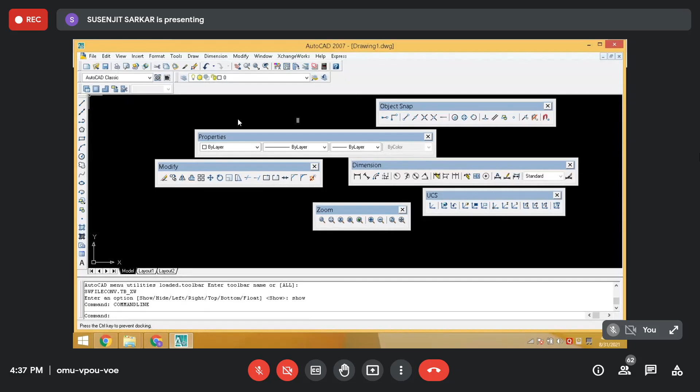In similar fashion, I'm doing this. Okay, this one, I want to remove, cross it out. I don't want this toolbar for the time being. Okay, there is another one. Layers, close it.

Okay, now your screen looks like this: this is the title bar, then menu, standard toolbar, working space, layout model tab, and this is the command line.

Just at the bottom, you may have some other tabs which indicate different modes. You will understand this later. At the bottom left corner of the screen, you can see some digits. Can you see it? These are basically coordinates, X, Y, Z.

If you move your cursor on the screen, you can see that X and Y coordinates are changing. I'm not talking about the units; we can fix the unit later. X and Y coordinates are changing, while the third one, the Z coordinate, remains 0, with no change. This means that on this black or white space, if you move your pencil or cursor, you are basically changing your XY position, XY coordinates, without changing the Z coordinate.

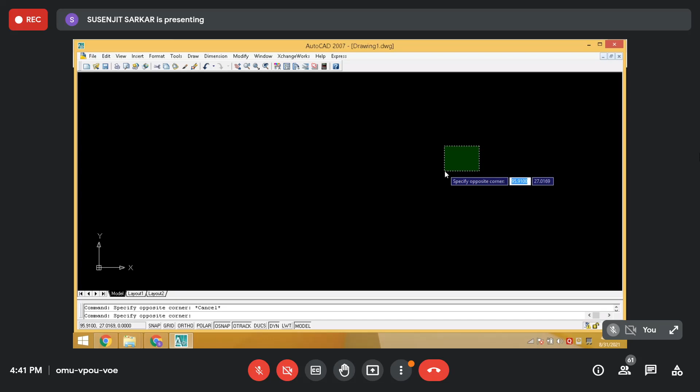Right. See here on the screen, some command prompt is invoked. To get out of this command, what I have to do is press escape. I have to press escape, then you will see the current command is stopped. So remember, if suddenly or accidentally any command starts working without your knowledge, or by any mistake, to get out of that command you have to press escape.

Okay, now I have to bring back those toolbars which are necessary for the drawing. All of you can see my command. What I do is move the cursor very slowly between the menu and standard toolbar. This is the menu bar, this is the standard toolbar. Place the cursor in between the menu and standard toolbar, which is neither on the menu bar nor on the standard toolbar.

Then press the right button of the mouse. If you press it, you will see a pane will open like this, where many things are written.

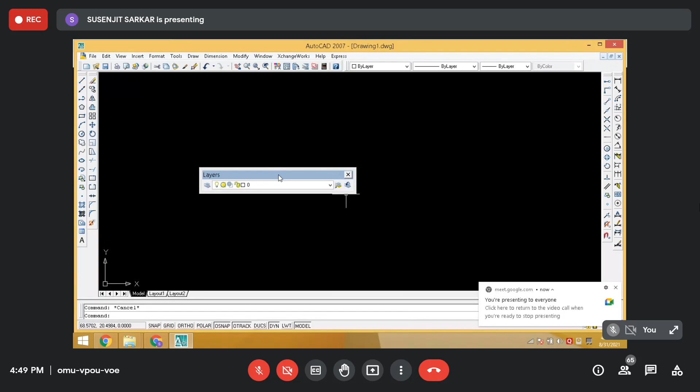Then the layer toolbar, which is very important, layers, just below the standard toolbar. Viewport toolbar, which is also important. Zoom toolbar, very important. UCS, User Coordinate System, important.

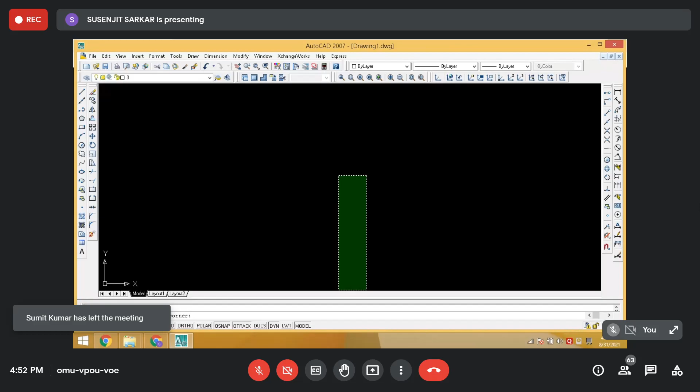Now, anything you do here—suppose I click, suppose I press the left mouse button on the screen, keeping the cursor on the screen, you will see that coordinates here are changing. At the same time, in the command line, command prompt, you will see the command specify opposite corner. AutoCAD is asking me to give the opposite corner. That means whatever I do on the screen, everything will be stored or written on the command prompt.

Someone is trying to join. This is done.

Actually, this happens accidentally, so to get out of that I press escape. When I press escape, you will see that this line will go out. See, it is refreshed.

Now, you have to make your screen look like this. Okay, so hopefully the first part is clearly understood by you all.

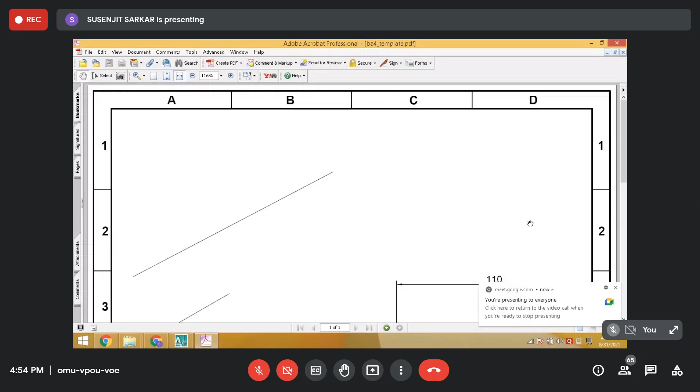Next part is this one. Can you see the screen? Yes sir, yes sir. This is called the template.

In the first year, first sem or second sem, you have drawn some figures, curves on the drawing sheet or A4 sheet, where you have made the template, with outside lines, borders. So here also in AutoCAD we can prepare this kind of template with margins and border lines.

In manual drawing, for each assignment, you need to prepare the template. That was a little bit time consuming because you are doing the same thing for each assignment. But here in AutoCAD, you have an advantage.

If you can prepare this template once, you can store it with the extension DWT, meaning template extension—dot DWT files. It is called DWT files, template files. If you can store this file in your system, each and every time you can call this template and draw on the template itself.

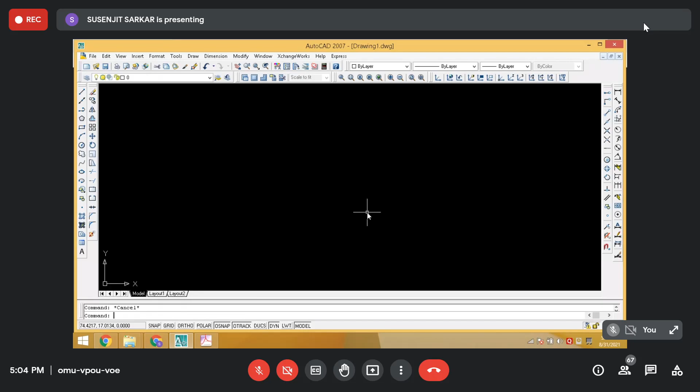Now you have to do one thing - these are very, very important steps while creating the template. And if you create the template and save it, when you call back the template for a newer assignment, all the settings will be saved as it was created during the time of creating the template, right? So these are very important.

Next, you have to go to Limit. Limit is a command, it's called draft setting, that you will understand later. Format - where is the... Limits. Is not there. Okay, because here I want to give a particular command which is called limit, right? And this command may be under edit menu, view, insert, or format. Actually, I forgot where it is.

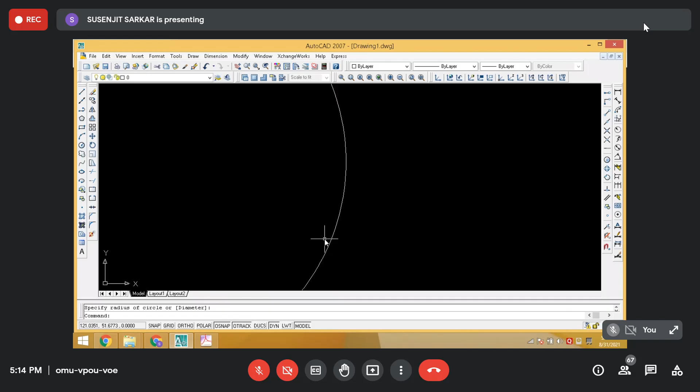Now suppose if I draw one circle like that, you will see that this drawing cannot be seen here because there is no tab. You will understand it later. But I want to show you that if you draw any line, suppose I have drawn a circle over here, and if I take a viewport of this size, then with the help of the viewport, I can see the same drawing over here. But if any portion of the drawing goes out of that limit I have provided, that won't be shown over here.

This is number one. Number two, any line beyond this hidden line, fence line, that won't come on the layout. So this hidden line has got meaning. In that sense, whatever you want to see on the screen or in a print, you have to do it within this fence line, not beyond this line.

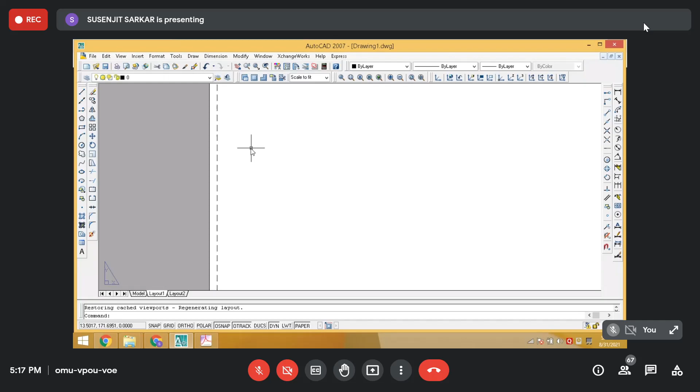Now I have to create a template. For the template, you have seen that the margin lines are thicker lines, so I have to provide some thick lines. And this is done with different layers, with different colors. So we have to understand what a layer is.

Layer is basically that if you want to do the same kind of activity on a screen, that will be saved as a particular layer. If you want to do different kinds of activity, that will be saved in a different kind of layer. Suppose in one layer you have drawn some figures with some thickness, but in another layer you want to give a thicker line, or with different colors, or with some other properties. So you always want similar kinds of things to be stored in a particular layer.

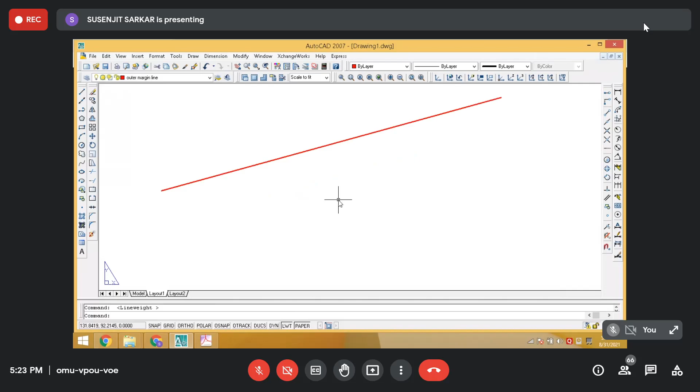This is number one. Another thing, if you click at the bottom, follow my cursor, you will see there is LWT, line weight. If you click it, you can see the thicker line. If I click this one, thin line. If I click it, you can see the thick line.

Zoom all. Delete this. I have to draw a rectangle for the margin. So what I do, I select this rectangle command from the draw toolbar. If I click, follow the command line. Click it. Specify for the rectangular command is invoked. Asks for the first corner point. So you can zoom in, zoom out just by rolling the scroller of the mouse.

Scrolling on the mouse. So what I have to do now, I have to draw a rectangle, but in the command line it is asking for the first corner point. My first corner point is obviously this one, the lower corner of the drawing sheet. But I know at the same time, if I choose any point outside these hidden fencing lines, it would not come in the print.

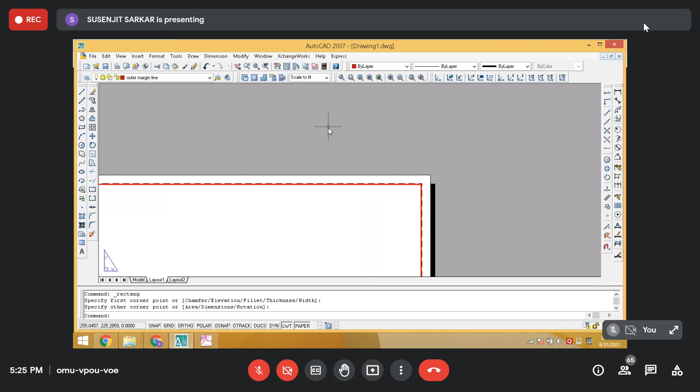Line weight is on, so I make it off. Zoom all, click zoom all to bring it in front. So this is the outline. I do it further. Okay, I delete this one. I want to do it once again. Click this one in this layer.

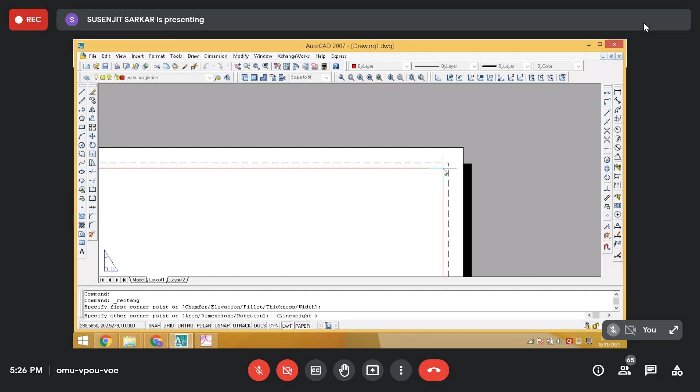So you can see the margin, right? Now, as per drawing, this inside line is 10 millimeter. This gap is 10 millimeter. Nowhere is it written, but it is 10 millimeter. Within the outer margin, you have to draw another rectangle, right?

Now, there is one way I can draw another rectangle within this bigger outside rectangle. But the gap between these two rectangles is 10 millimeter, that I don't know here. How can I control this distance? So I can measure the length, I can do it. But there

is another way. See, in the previous command I have used the rectangle, right? I have drawn the rectangle. At present, I want to draw another rectangle within the outer rectangle, which is 10 millimeter within that from all sides. Now, the inner rectangle I have to draw.

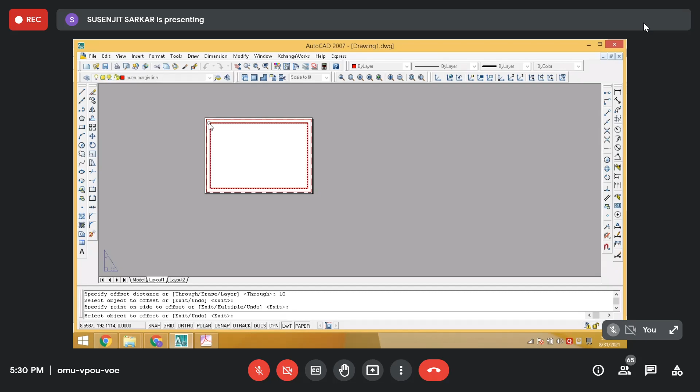Which side? You want to do offset on this side, on the left-hand side, or the right-hand side? Obviously I want to do offset on the right-hand side, which is the inner side. So I have to just click with the left mouse button on the right-hand side within the initial rectangle. Click it here, see what will happen. See, the shorter rectangle has been created, a smaller rectangle has been created.

Now suppose, see, this outer rectangle is created with the outer margin line layer. The inner one is created with the same layer. Now you want to change this layer because you don't want the color and the thickness, you want to change the property of the smaller rectangle, right? You don't want the lines to be thicker like that outer one, right? So again, you go to this.

First of all, create one layer. See, this is inner, right? I-N-N-E-R, inner margin.

Which color? Green. Okay, continuous, default thickness. I want this line to be a little bit thinner. Initially it was 0.4, I'll choose it to 0.35. Okay, so okay.

Apply. Okay, now this layer is not changing, right? Because I'm not changing it. So what you have to do is escape first. You have to go to the new layer, because the inner margin, this is the inner margin, right?

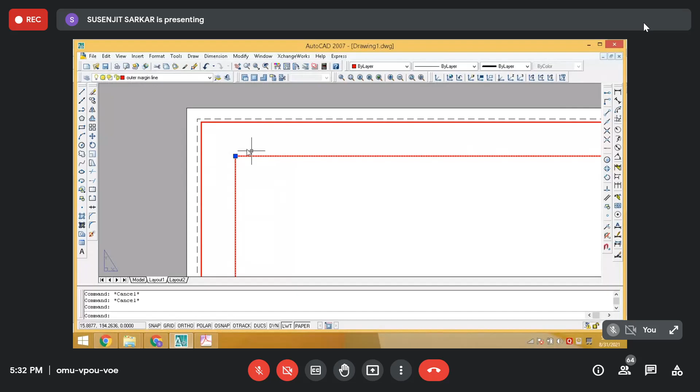Sorry, it was in the outer margin, right? Select this one, I have created the new one. New layer, I want to change it to the new inner margin. Click it. So it's changed. Escape, right?

If you want to delete this one, suppose you want to delete this one, you can delete it. Okay. So, okay, that's true. Okay. So the red line is for the outer margin layer and the inner one is for the inner margin layer.

Now I have to draw these vertical and horizontal lines, right? These are called basically grid lines. It has been explained in the first year classes what is the importance of the grid lines. You know that. So how to do these grid lines?

GRID. Okay, and these lines, you want to change these lines with, suppose, yellow color, right? And the default thickness, give a thickness of, say, 0.20 millimeter. Apply then, right?

Now you have to draw these lines, the grid lines, in this layer. Okay. Before that, you have to divide these lines into segments and find out the point from where you can draw the vertical and horizontal lines. So how to do this?

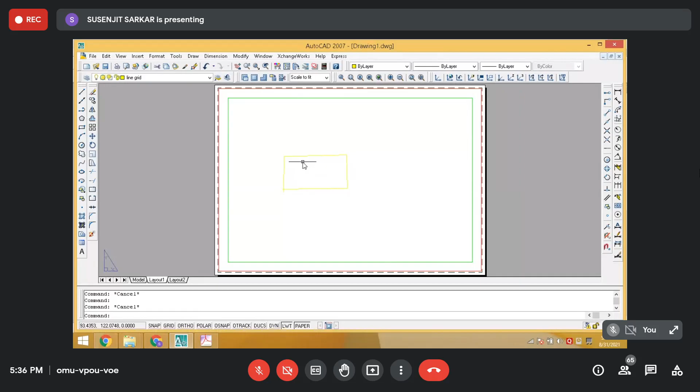You can see that whenever I select one, say this one, escape, or this one, right? The whole rectangle is selected with all four sides, right? There is a reason behind this. If you have drawn rectangles like that, and if you want to select one line, second line, third line, you can see all the lines are selected separately,

right? But here, these rectangles are selected with all four sides because these lines are basically polylines. All segmented lines are connected, so I have to break this. I have to break this. So to do this, I have to go to explode. This is the explode command, because it comes under modification. I have drawn the rectangle and then I want to explode it. So it comes under modification, that you have to understand.

So you can select this command from here, or you can write explode in the command line in this way. It will ask for the object to explode. Obviously this one I'm selecting for explode. Then press the right mouse button to confirm it. When I press the right mouse button, you can see here actually the lines are exploded. See, all 4 lines are not selected at a time.

Yeah, now why have I done this? Because I want to select a particular line and then divide a line into equal number of segments. That is the reason I have to do explosion. Now I have to divide this line because I have to place the grid lines. I have to divide this vertical line also. So how to do this?

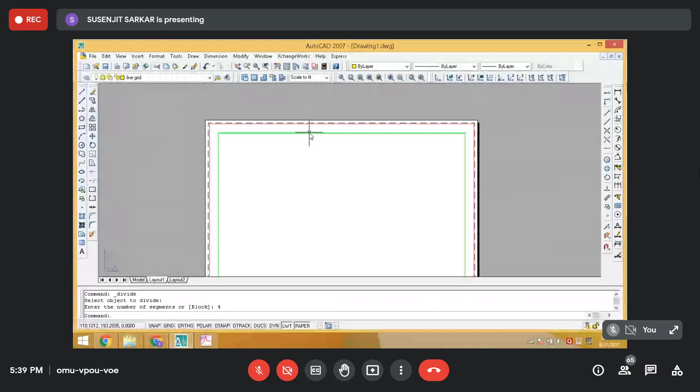Okay, I think it has been divided, right? Because I have selected this one. Now to view this one, because these are points on the line, we cannot see it. So we have to see those points.

How to change the point style. Can you see it? These yellow lines, can you see the yellow lines? Yes sir, these are the markers. I've just changed the point style, right? So now I can see it.

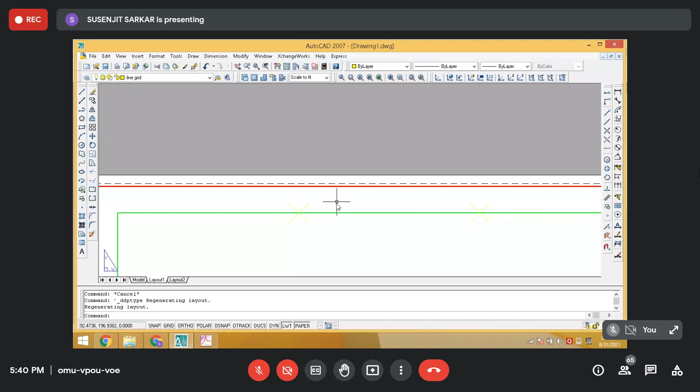Now I have to draw the vertical lines, these vertical lines in this way. Now it's very important.

I have to start a line from this point, this intersection point, and move it in the upward direction with an angle of 90 degrees, right? Now, I don't have any set square or measuring instrument so that I can draw a line that way. So there must be some tools by which we can draw these vertical lines and start drawing the line from the exact point. That is very important.

I mean to say suppose I have drawn this line, okay? Now I want to draw a second line. I have to draw it from the end of this, right? In manual drawing we can draw it by trial and error, but in computer, how can I do this?

So for that we need this toolbar, that's what I was saying before. This toolbar is called the Object Snap toolbar. When you move your cursor over the different commands, you will get to know and understand all the different commands, right? So I'm not elaborating this one, but you have to try on your own to understand this. But the function of the Object Snap toolbar is very important in this respect, you understand now.

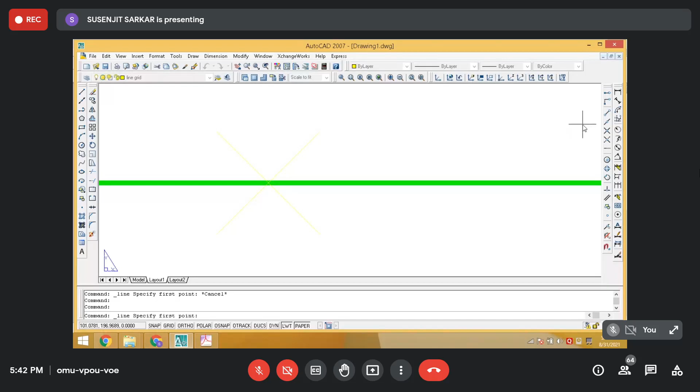So for that I have to use the object snap over here, right? Snap to the intersection. So this is the intersection point. I click this one. See, it is giving me the extended intersection. Or you can click it here, object snap.

You'll get it. If you don't get it, go to format toolbar, drawing limits. Sorry, drafting style, where is it? Drafting style. Dimension style, drafting style. Just a minute. Dimension, with dimension.

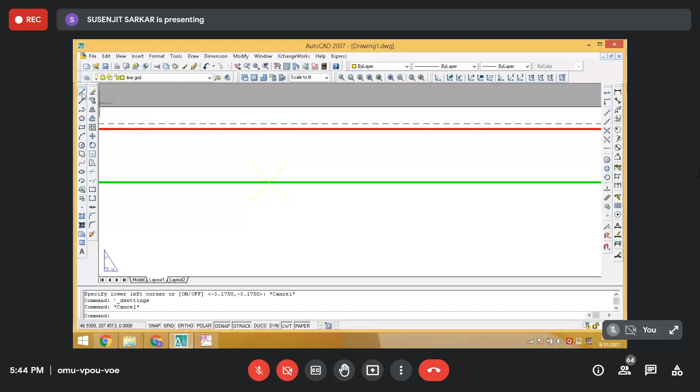Now you go to this command. See, once I check the tracking, it tracks automatically. If this is off, it won't track. If track is off, it won't track. Okay, so it is tracking. You don't need to click this snap on, because I have already made it on by default. So now you are confirmed that this is the intersection point.

This is the starting point. Now you can draw the lines. So vertical, perpendicular. See, so I've drawn the perpendicular line. I can draw it over here again.

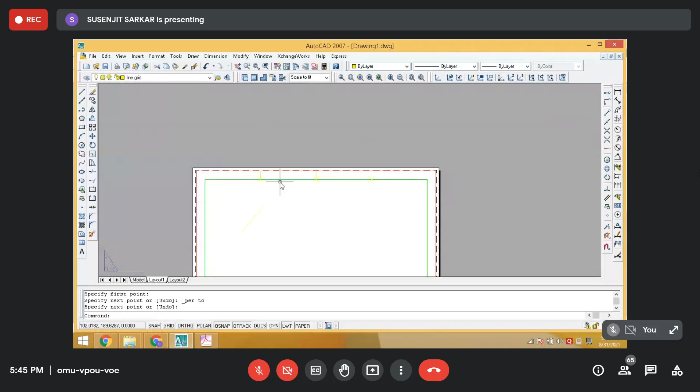I click line command. I go to intersection. Then here, if I'm not getting the snap or track, click on track. Now you get this one. Right? Then you have to draw a vertical line. So you can go again to this perpendicularity, snap to perpendicular. So it will give you the perpendicular. Click confirm. In this way you can draw.

There is another easier way to draw these lines. Just copy this one. Because I have already drawn this, I don't have to draw it further. So now I can just copy it. This is the modify toolbar, obviously the copy command will come under modify toolbar.

So go for the copy command. It asks for the select object. Select this one, confirm it by right clicking the mouse right button. It will ask for the base point. So this is the base point, right? You select this one, then you move over here. See, it is drawn, right? You understand that?

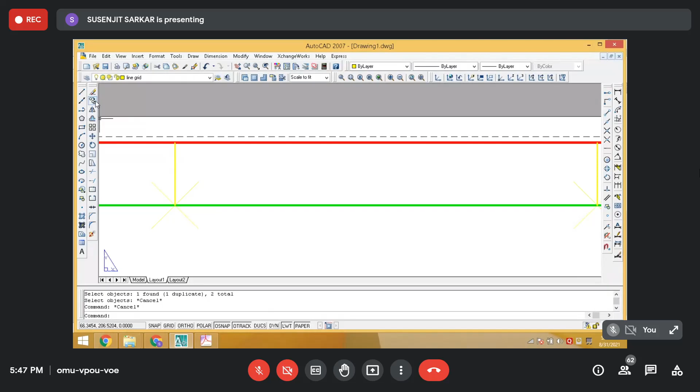Similarly, you can draw the lines over here. How? Copy, group copy this one, this one. Escape. Again copy this one. Okay, I have selected the object, right click for the confirmation.

Now I have to move it over here, right? So it will ask me to specify the base point. So now I choose this as a base point, this intersection point. Now I want to move all those lines orthogonally in this way, you can see the yellow lines move this way. So for that I click ortho, that means it will move perpendicularly, and select this point perpendicular. Right click for the confirmation. You see the lines have been drawn here.

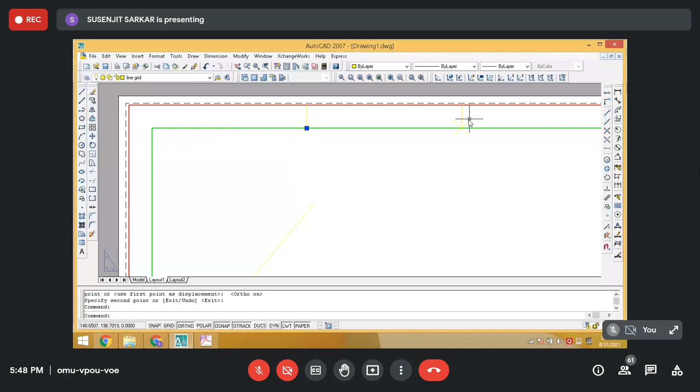Okay, I can delete these lines, this one, this one, this one, by delete command, this one by delete command.

In a similar manner, I can draw the lines over here. I'm doing the lines a little bit faster for horizontal lines.

So what I have to do is go to Divide, select object to divide. I have to divide this one into 4 segments, enter. Previously I selected the point style, so here it comes as a cross mark.

Now I have to draw this one, copy the line, right click for confirmation. This is the anchor point, this is that, copied.

Now I have to move these lines over here. Copy, group copy, select this one, select this one, select this one. Right click for confirmation. Specify base point - my base point will obviously be this section. I have to move it orthogonally over here. Check it, it is perpendicular, so enter, escape.

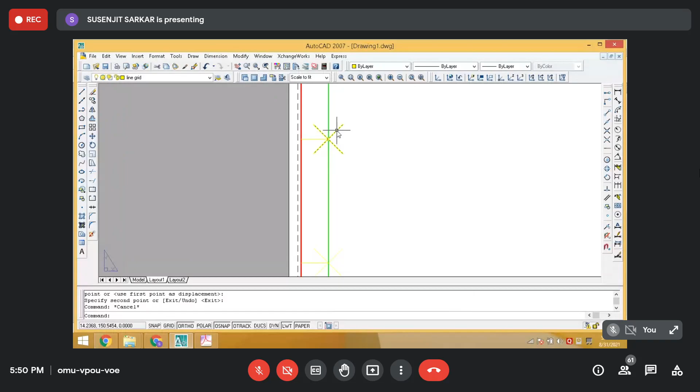So I'm deleting this one, this one, this one. So I have created these lines, the grid lines.

Now as for the figure, I have to write ABCD, 1, 2, 3, 4, right? Look, I'm doing this.

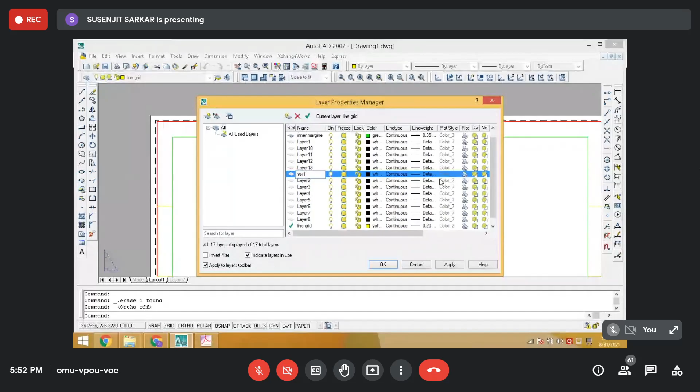For writing text, I prefer to take another layer. Write text one, give it a name, text one. Apply. Select text one.

Because here the texts are not written, texts are drawn basically. So the text command comes under the draw toolbar. Click this text, write it this way, capital A.

Okay, it's very small, right? So I can do one thing - I can increase the height, say 6. It will look like this. No, it will be bigger. If 4... no, 5, bold. Okay, right. Now I move this text from here to here.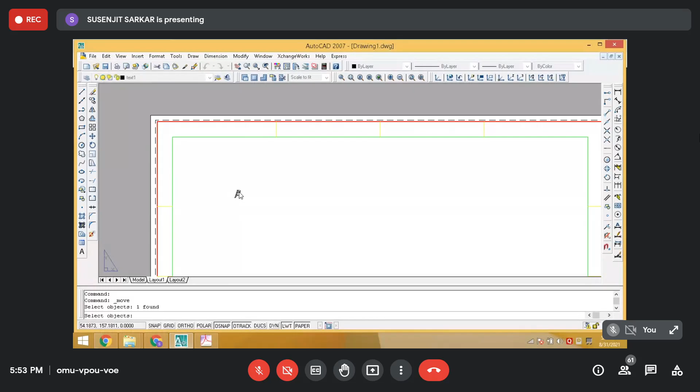So here in the modify toolbar, you can see there's a move command. Just click move, select this one, right click. Base point is this one, any point you choose, and try to place it centrally, keeping object snap off, tracking off, just with eye estimation.

Now, once you have placed this one, you can now place it in this grid. So just do the same thing - copy, right click, object snap tracking on.

You have selected this one. Now you can move it orthogonally. Why are you doing this? Because in this case you only have to check the left and right side. And now turn tracking off.

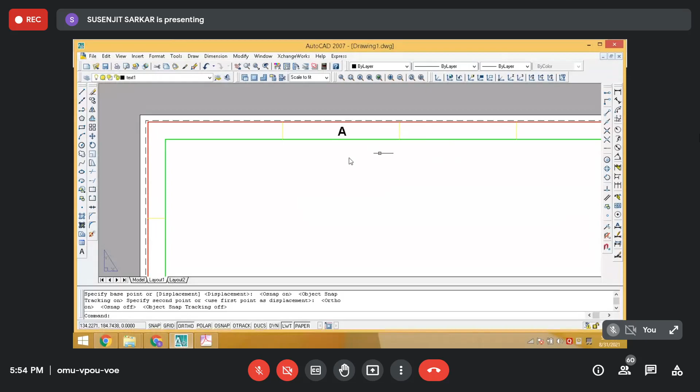Oh shit. Copy. I made one mistake because I have to move it with multiple commands. I'll do it again. Select object, right click, object snap on. There is no multiple option.

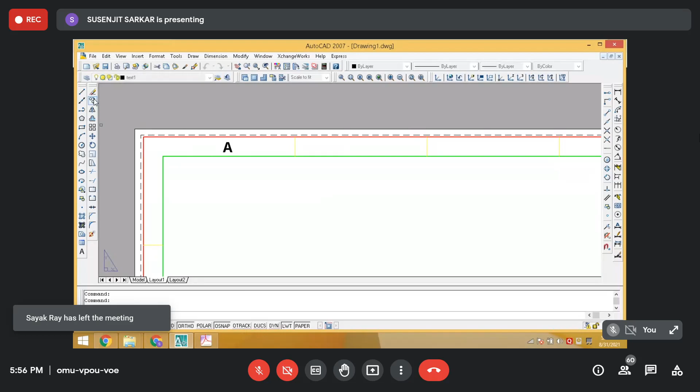M. How to do it? Just a minute. Move command - oh sorry, I have to copy it. I made a mistake. Instead of move, now I will copy it.

Snap off. B, C, D. Escape. So now you can change it here. Write B. Okay. C. Okay. D. Okay. So you've done that.

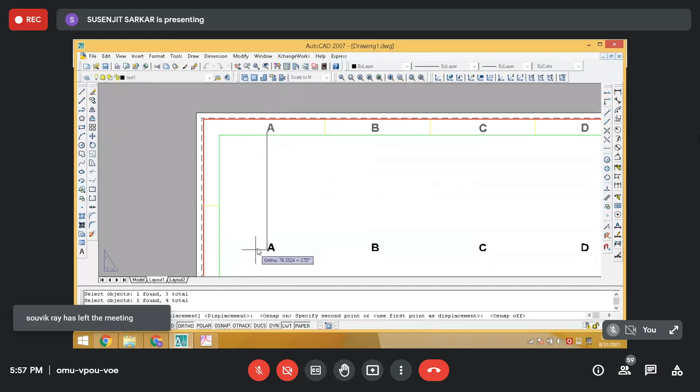Now you have to write ABCD over here also at the bottom. So copy it. Select 1, select 2, select 3, select 4. Right click, object snap on, select the anchor point. Now snap off, zoom all, zoom it here, see the vertical above and the bottom, just need to press in between lines. Apply it.

In a similar way, we can write one - how much was it, I think 5? It was 5, I think, no? Or 4. 4 with bold. Okay, your size is 5. Change it to 5.

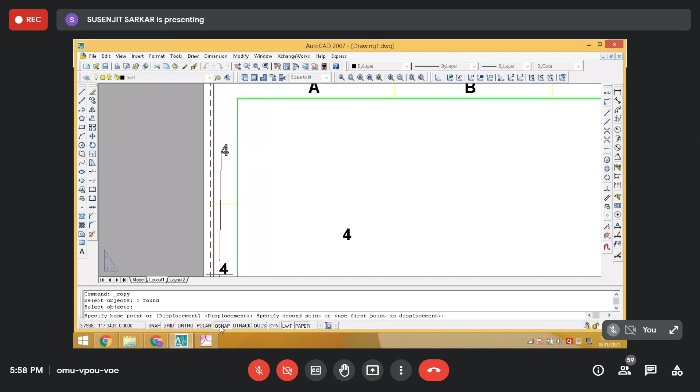Okay, now copy this one. Right click. Snap on. Ortho off. Press it here. Escape. Copy. Snap off. Ortho on.

Okay, now you change the name. It will be 3. It will be 2. Okay. It will be 1.

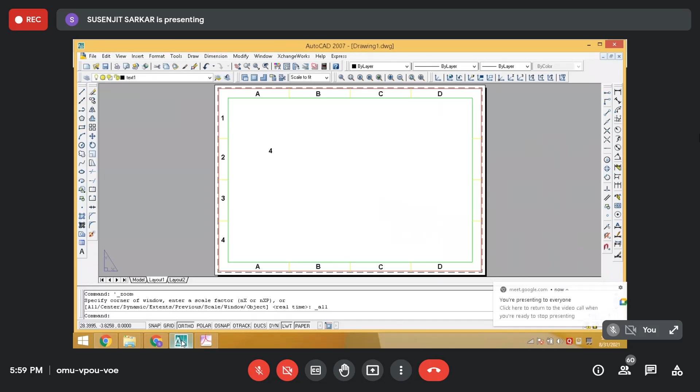Now you have to move 1, 2, 3, 4. So it is not move, copy again. 1, 2, 3, 4. Right click. Object snap. Now snap off.

So see, these grid lines are done, and the grid numbering is done, right?

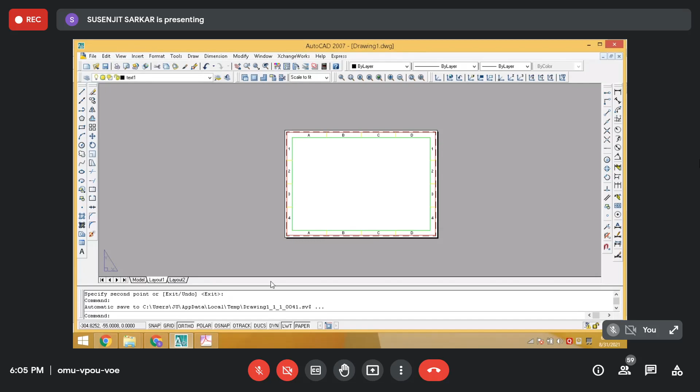So I have to do this in a different layer. To create another layer. This is for title, write TITLE, title box. Sorry, TITLE, title box. Okay.

Now we want to see the line with blue color. Will it be okay? Okay, blue. And the line thickness, what will be the line width? 22 was for the vertical line, so make it 18 or 20. Okay, 18, 0.18 millimeter.

Will it be good or no? Just change it, okay? Do it 0.25. 0.25 will be good, 0.25 millimeter. Apply. Okay.

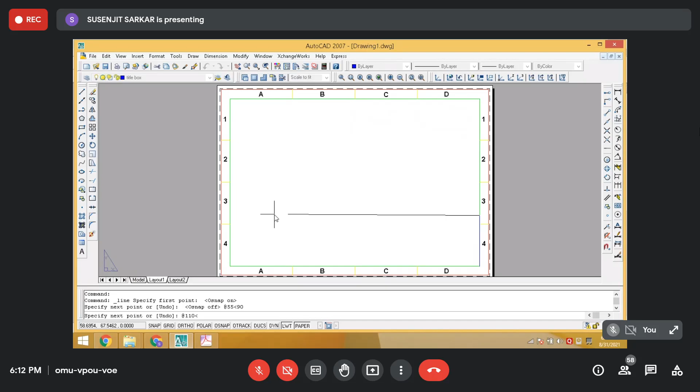Okay, and this length is 110. So now I can, since the initial point is given, I can give a command in the command prompt: at the rate, how much length? 110. What is the angle? 180 degree, 90 from 180 degree from positive x-axis. See? Okay, now I can close it.

Now, when I want to close it, you can see this line also, it will be a vertical line, right? So instead of writing the same command, I just click ortho on, right? Now see, and snap on. As simple as that.

Okay, now this 55 height is divided: it is 25, 55, 25. Okay, I will do it again, and then this is 15, 25. How much it comes? It is 10 then. 10, 25, 55 is 30. 30, 10, 10, 10, this is also 10. So 10 gap, I have to draw the horizontal lines at 10 millimeter gap.

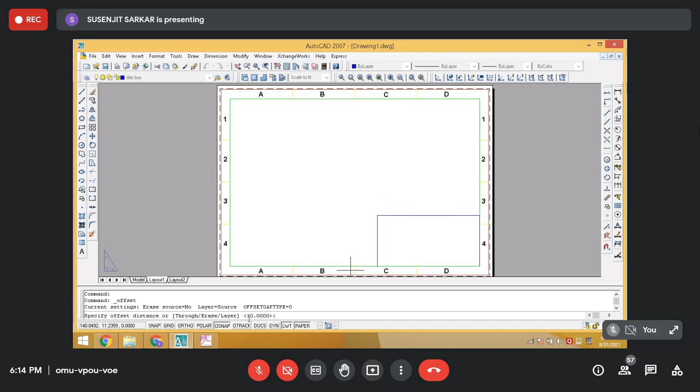So what I have to do, I have drawn this line already, so I have to just make an offset of this one. Offset. It's not taking snaps with tracking. Now I have to give this 10 millimeter. Select this one.

To select this one, this, right? Okay, escape. You see how much? 1, 2, 3, 4, 5. 1, 2, 3, 4, 5. Right. And from here it is 25.

From here it is 15. It is 55. Okay. From here it is 55. So I have to draw another line from here. Take a snap from here.

Right, 55 at the right angle. How much? 180 degree. 180. So this is the line, right? I've dropped the line like that because it is better to have ortho on.

Now I have drawn this line, and 1, 2, 3 lines. Now I have to delete this line, because there is no line. Achha. This line is basically overlapping, so I can delete this one. So the left hand side of this line, this portion has to be deleted.

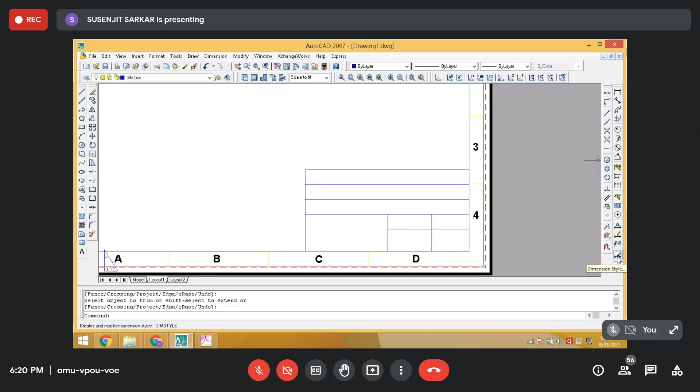So this is the dimension toolbar. So you have to go to here, the dimension style. Okay, you have to go to modify over here. From here, you can change the different shape. Precision, you change to 0, right? First, so start from the lines.

Extend beyond ticks. Baseline spacing. Vertical above, right above, horizontal center, aligned with dimension line, right? Then above, centered, aligned with dimension line. There are other schemes also.

You can choose this one, but for that you have to set this dialog box. You have to save it, right? You have to understand it. But for the timing, you start doing dimensioning with this standard, which is aligned with dimension line. Dimension has to be put above the line and it has to be horizontal. Okay.

Lines. Baseline spacing. So there is the extension line and the baseline. You want to put the number. So that spacing, suppose you want to give, say, 1.5. Right?

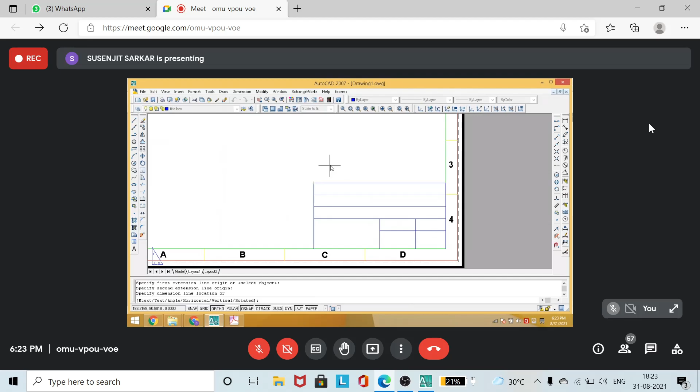This is the extension, this is the gap, right? That's okay. This is the height of the dimension, so I think it has to be increased a little bit. So delete this one.

So you change the arrow size to 1. Lines extend beyond dimension line to 0.6. Offset from the origin, it gives 0.08. Sorry, 1.8, okay. Text height, you provide text a little bit larger, say 3.6. Let's check what happens.

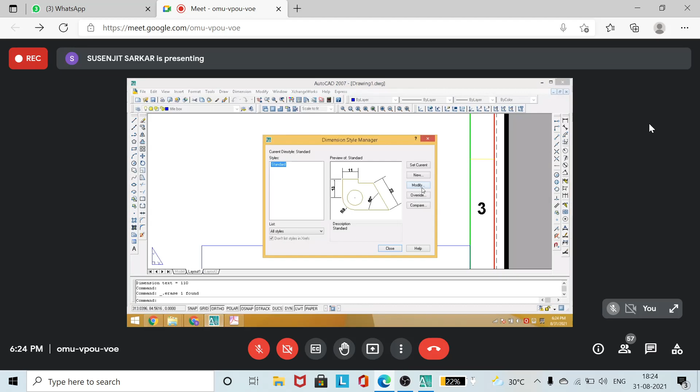Okay, this is okay, but I have to increase this one now. Let's do this one thing. Again, I have to go to this.

That's okay, offset from the dimension line. This is not changing. I have to change this one. Offset from the origin, that is clear. Extend beyond dimension line, make it 3.

Okay, arrowhead, arrow size, make it 2.6. Okay, okay, now it looks better. So in this way, you can modify and save a particular setting in a template. Okay, now I'm deleting this one.

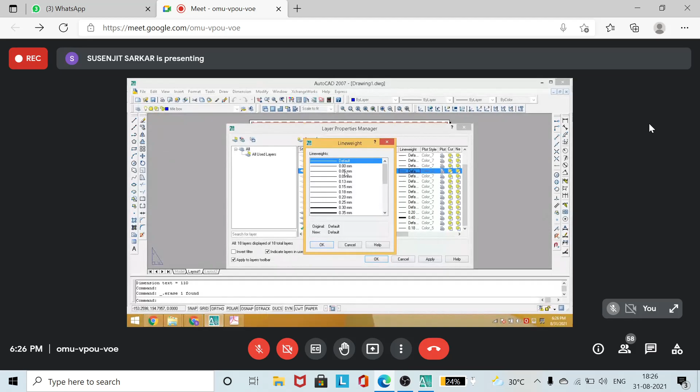Now I want to take another layer for dimension, continuous color. You want to change color? Which color do you prefer? This one, gray. Okay, and the thickness, the dimension line thickness has to be very thin, so I've given 0.05. Right, so I've given the dimension line. Oh sorry, I have to change it.

I think this value I have to change. Let's see. Modify text height for... okay, modify, okay, close.

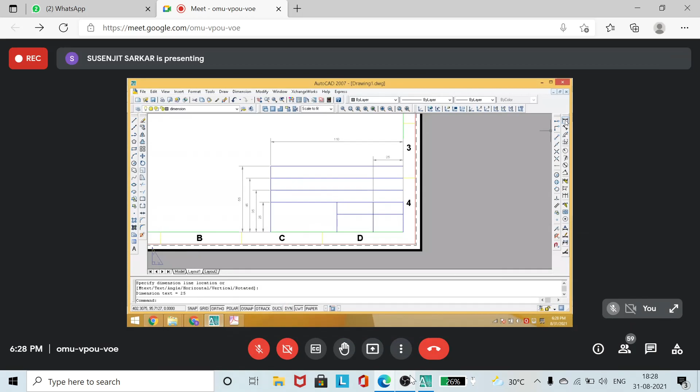Now, snap. Okay, this way you can give the dimensioning, you can do the dimensioning.

Now you have to give name over here, like this: Jadavpur University name, class, roll number on the same line, then the title of the drawing, and then you have to write this thing which are very standard. So let's do it.

Now go to text layer. Text one, this one, right? Okay, oh sorry, click texts. Ortho may be on, but the snap tracking may be off.

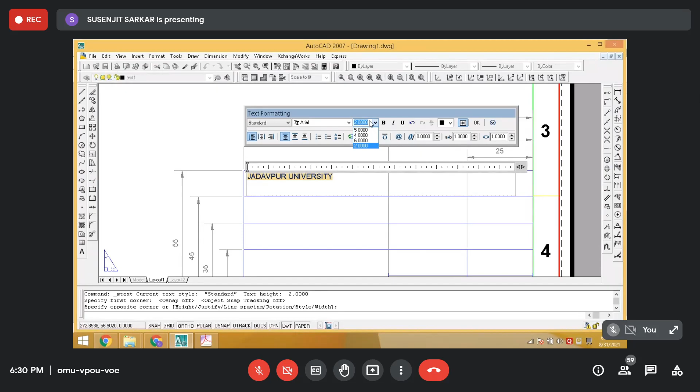Right, but to write, Jadavpur University. Jadavpur University, so increase the size. 6 is okay, okay, you can change also the color.

Okay, right, now just by selecting this, you can move it. Right, then you can write your name. Just copy it, copy.

Hello. Hello. Yes, hello sir. Why is there noise coming?

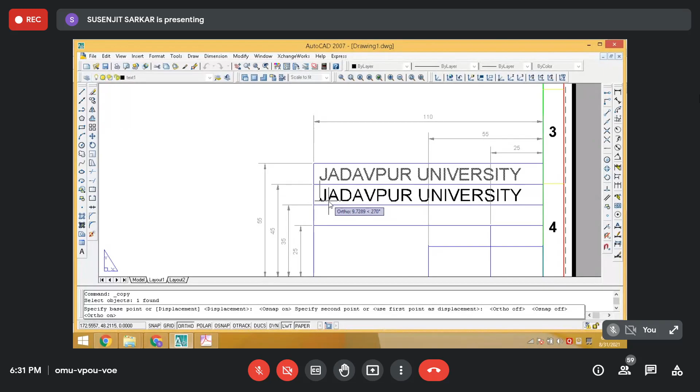Right, copy. Ortho on, snap off, so that it aligns. That's got alignment with vertical line. Okay. Okay. Do it like that.

Then select this one, change here with your name, no? And the name: Arghya. So, Arghya.

Change the size, smaller. Okay. Change it to your class and roll number. Class, say EE or ME, sorry, ME-2, right. Section, say A2.

You can write in this way, give a dash, right, then roll. Sorry.

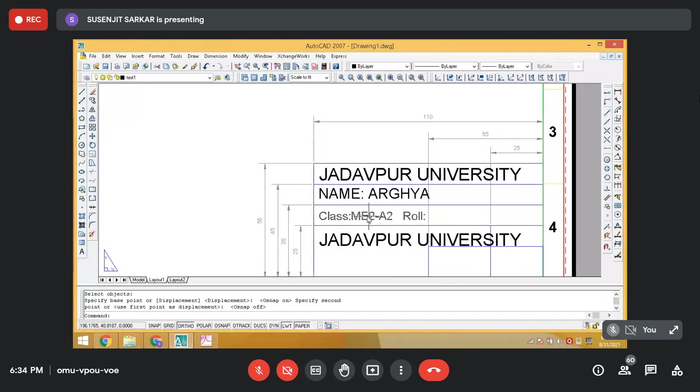And this is the title box. Here, sorry, this space is the title, drawing title. So what I can do is make it in this way.

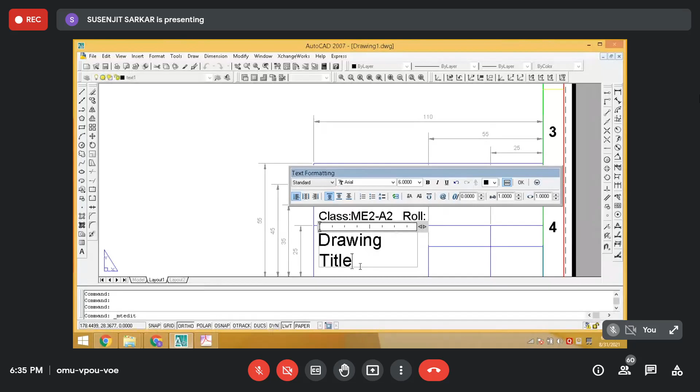Okay. Title of the drawing you can write over here in this space. Here you have to write the dimension type.

So in standard title box, this statement is written clearly that all dimensions are in millimeter. Why is it written? Because, see, here I have not given 25 millimeter, 35 millimeter, or 45 millimeter as units.

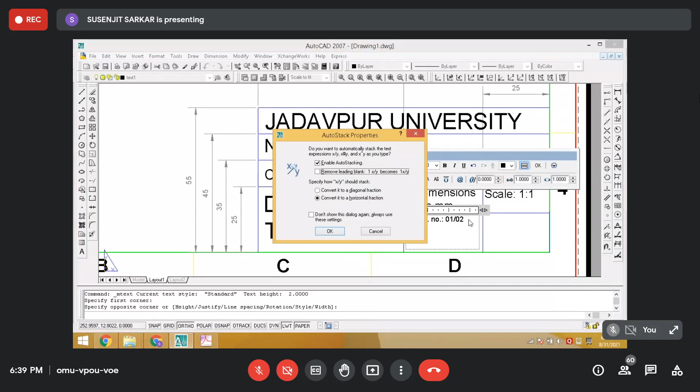And then you can write the date, say 31/08/21. You can give it a bigger size, or 2.5, 2.5. Okay, right.

So in this way, you can give the numbering to the drawing sheet. This is assignment number 1 with problem sheet 2, or the drawing sheet 2.

Here is the place for the angular projection. Now what is the angular projection? I explained in earlier classes that in 2 ways we are going to draw the drawing. One is the American way, another is the British way. Number 1 is the British way, which is the first angle projection.

If you have a truncated cone lying down in this way in front of you, you will see it as a trapezium, with axis horizontal. If you see from the left-hand side, you will see the 2 circles, the top circle and the base circle. If you see from this side and draw what you see from the left-hand side on the right-hand side, that is the first angle projection.

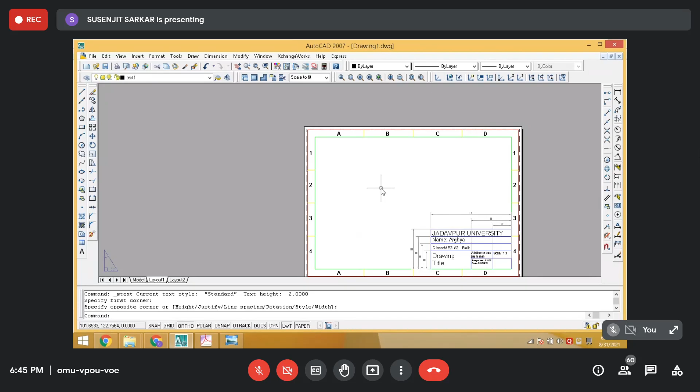I'm taking another layer, which is the draw lines, drawing lines. DRA, draw line.

Okay, so I choose the same color. The continuous line is this continuous one. The thickness - this is the outline, I consider as 0.3. Right, outline of the objects, I consider the thickness of the line as 0.3. Color is same, I don't want to change colors.

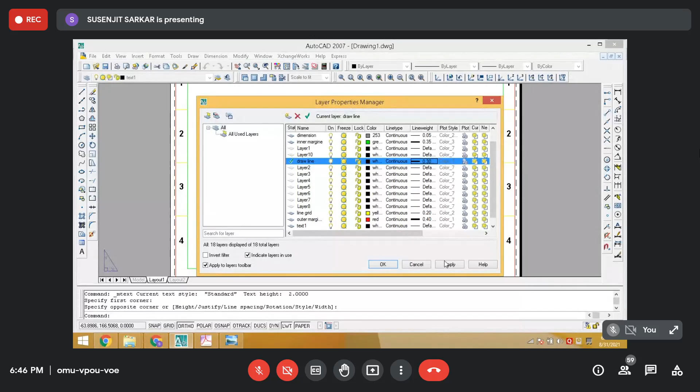Apply. I want to take another line, another layer. That is for the drawing line, the continuous thick line with thickness 0.3. And this line, this line is called center line, CENTER, center line - that symmetry line.

I want to take this symmetric line as this color. And the line is continuous - it is not continuous, it is chain line. For that I have to load the line, so I have to click load, and load the line from here - center line, center 2x, center 5x, this kind of line, center 0.5x. Okay, I've loaded the line, right?

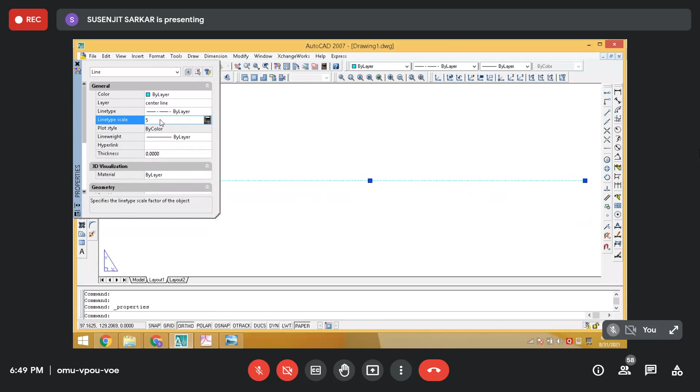Ortho on. Now here you cannot see the line, but if I zoom it, then you can see. And to make it visible as a center line, I have to scale - change the scale of the line type scale here. Suppose if I change to 5, enter, can I see the line? Yes, now I can see the line, right? So I've changed it from the property.

Now I have to go for drawing this one. First of all I want to draw this bigger circle with diameter D. Here I choose the diameter as 10, right? And before that, just a minute - make it 5. For that I want to have a center point, right? Intersection point. So now to draw a circle.

For the circle, I have to draw with draw lines, right? So the draw line is this one. I select that particular layer, then go to circle command. Then object snap on, track on. Intersection point - you get the intersection point, right?

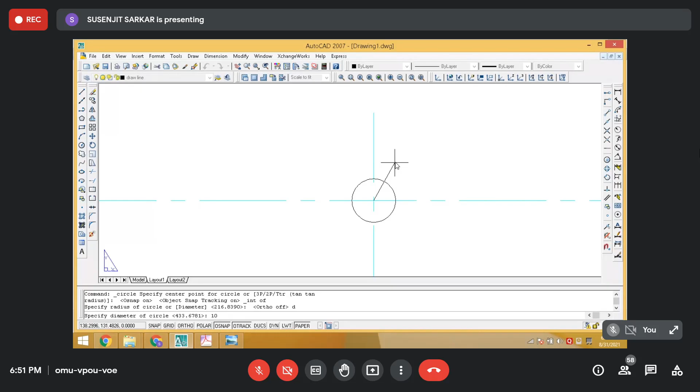Now I have to draw a circle with a diameter, say 10 millimeter. Radius or the diameter - I write here diameter in the command. So diameter, I choose diameter 10 millimeter. So this is the diameter. Now if I want to extend this line up to here, I have to go to extension. This is the outline, in this way.

Now in the figure, from this center to this edge is 1.25, that means in my case it is 12.5. So I have to take a distance 12.5 from here. Snap on - this is the intersection, 12.5, at the rate 12.5. This is with 180 degree angle. So this is that line. If I draw the ortho vertical, it will look like that. Now this is the starting point of this line.

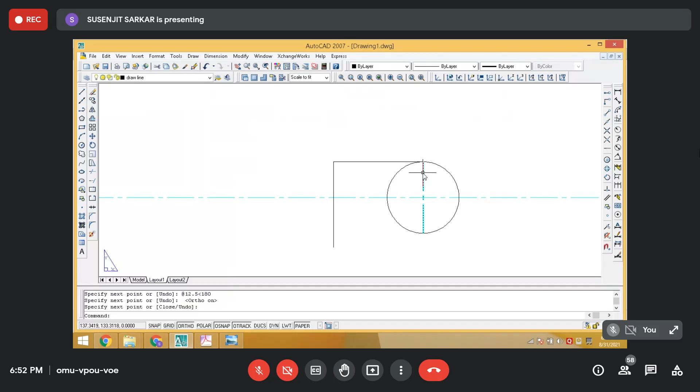Similarly I have drawn this. Enter. Now from these two points, I have to draw this inclined line and this inclined line, which is 30 degree - 15 degree and 15 degree, so 15 plus 15, 30 degree. So if it is a 15 degree line, then how much is it? 180 plus 15, isn't that 195? So I have to draw a line like that.

I have to make sure that ortho is off, snap is off, track is off. Right? Line length - any line length, say give it 15 or 18, something like that. Angle is how much? 195, no, 195. So this is that line.

I've drawn this line, I have to make a copy of this - mirror copy. So this is the mirror command. Click mirror, select this one, confirm it. Then specify the first point of the mirror line, because I want to have a mirror about this line. So these are the lines, make snap on - this is that line. Enter, see? This started from here.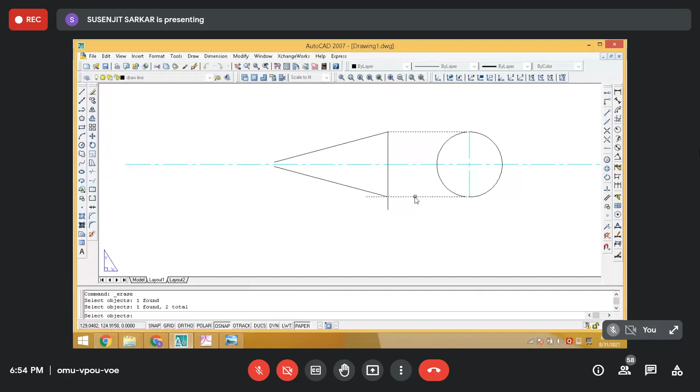Very clear, right? Now I can delete these lines, this one. Now here, then I have to go for diameter D, which is 10 from this end, to make it a truncated cone. So from here, intersection, how much distance? Enter, is it 10? This 180 degree angle, in this way. So this is the 10 line.

Now drop a line from here, make it vertical. That makes it. Now trim the lines, trim the lines, trim the lines, right.

Okay, you can check the angle between these two. So go to the angle in the dimension toolbar, check the angle - it is 30 degree. Okay, right, so it is rightly drawn. You don't have to give the dimension over here.

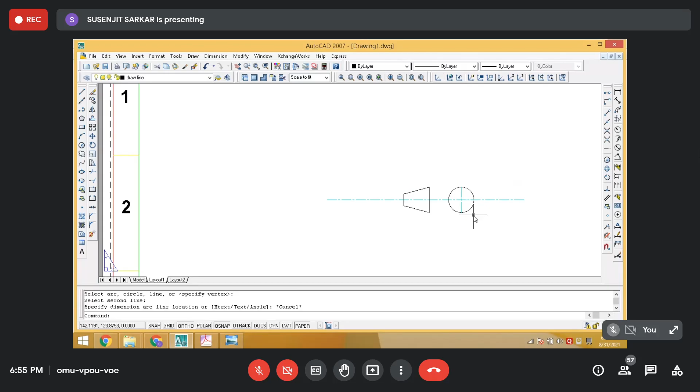Now you can draw the inner circles. This is the endpoint, ortho. This is the center, go for the center of the circle. Endpoint. Right.

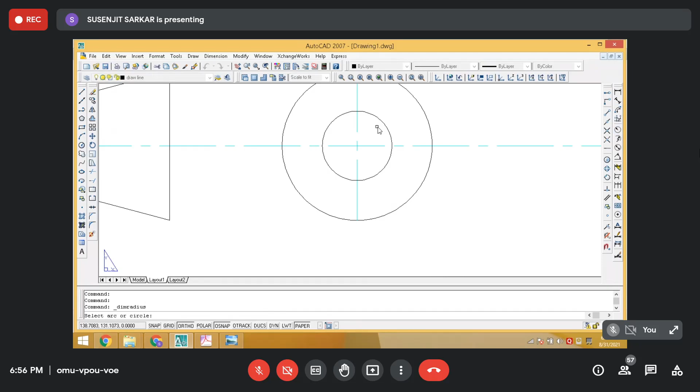Now check this diameter of the circle. It has to be 5. Check it. Oh yeah, 5. Do you get it? So if it is 10, it will be 5.

Okay, now do it in a better manner. A little larger. Then go to extension on this line, because I want to extend this line up to this, and then I have to delete the line in this way. Ortho.

Trim. Trim this line. Right. Keep it trim. Erase.

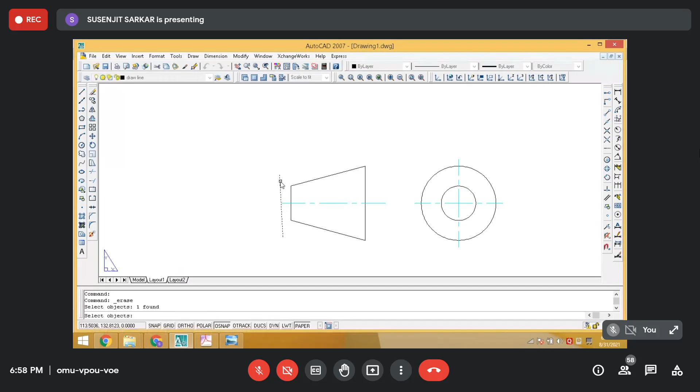Okay, I've drawn the angular symbol for the angular projection. I have to shift it over here. Okay.

Now copy it, copy the whole thing. Right click, specify the base point. So if you want to place it here, it is not accommodating within this space. So escape it. What we can do? We can scale.

Scale it, go for the scale command. Select object, select all. Right click, specify base point. Scale factor, how much you want to reduce? Reduce it by 0.8. Enter. Now it is smaller.

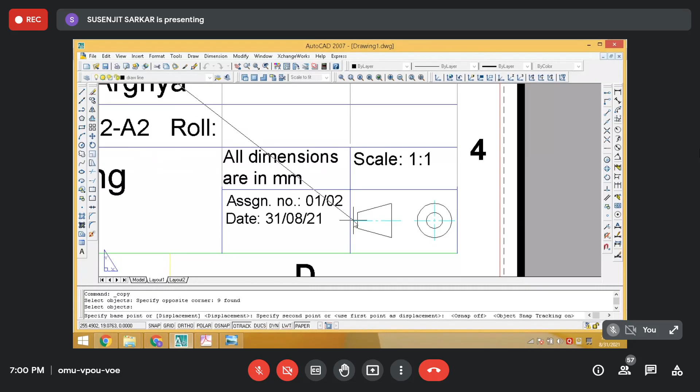Now copy it. It is just accommodating within this. Snap off, track off. Somehow I'm managing to place the angular projection over here. Now delete this one. Now see, this is your template.

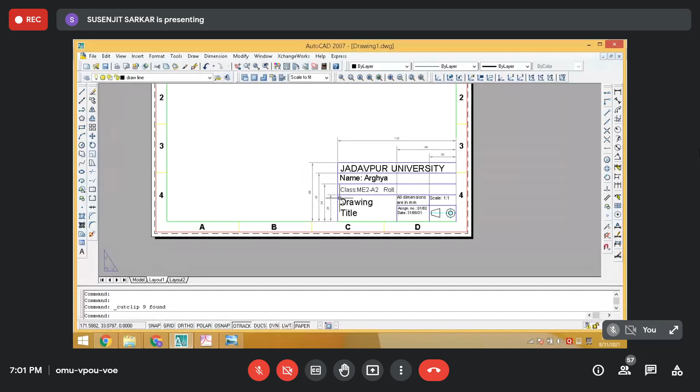Once you have done this, you don't have to repeat this one. You can make two templates with angular projection, first angle and third angle, right? In the template, you don't have to draw these lines, but for the first assignment, all of you do the same thing as it is here and make it PDF and submit to me as a first assignment, right? I want to see that. From first assignment onwards, for other assignments where you have to draw any other object over here in the template,

you are using this template as a regular template. There, you don't need these dimensions, okay? But in the first assignment, you have to do this for me, okay?

Now, so I've created the template. This is done. Now, how to make it PDF, right? How to make it a PDF. Okay, first of all, I want to save it. How to save it? Go to File, Save As,

create a folder in Documents or Desktop, anywhere, right? Your assignment folder or the drawing folders, but actually the drawing template, if you click it here, template is only saved.

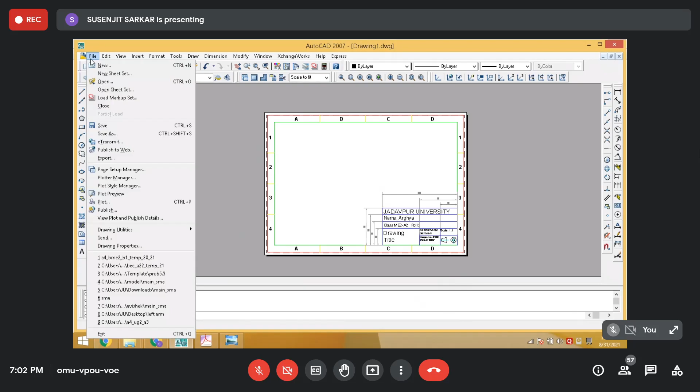Where is DWT? Just a minute. Okay, save as. I want to save as DWT, AutoCAD drawing template. There is a default folder where all templates are stored. So you have to save your template in that particular folder only, right? But for the drawing, you create another folder where you can save it in your name.

And you see that in the template, the extension is DWT. Here you can write template A4, BME-2, A2, B2, EE2, A2. Okay, in this way.

Save A4. Okay. Okay, so it is saved with extension DWT. And all the settings, whatever settings you have done over here, that has been stored. Okay, now save it there.

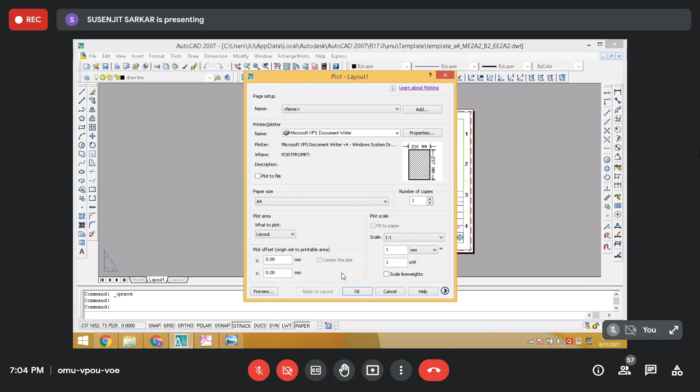Now is a window. Extend, go to extend, click this. Extend, okay. Sorry, I made a mistake. Plot is not extend, it is window, right? You have to select window.

If you select window, you can choose it from here, from this end, this rectangle corner. So that is the extent of my drawing. Once I select this one, now I go to OK. I can go to OK.

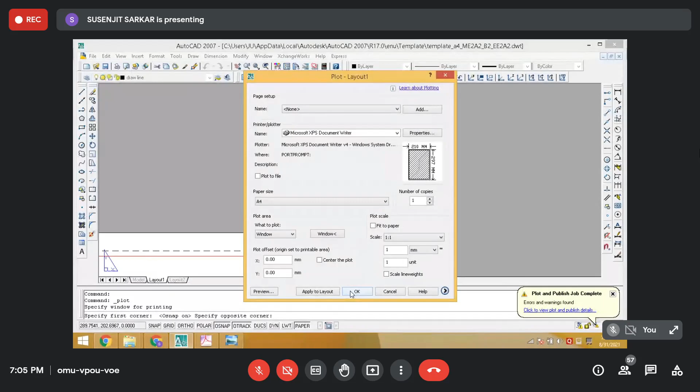So where is that? This is there, this is there. See, this has been saved in XPS template. Now, since I don't have that PDF printer, what I can do, I can use the same to convert it to PDF by online mode, right? I can change it to online, change it to PDF through an online PDF converter, okay? But in your case, you must have that PDF printer or something else, so you can do it.

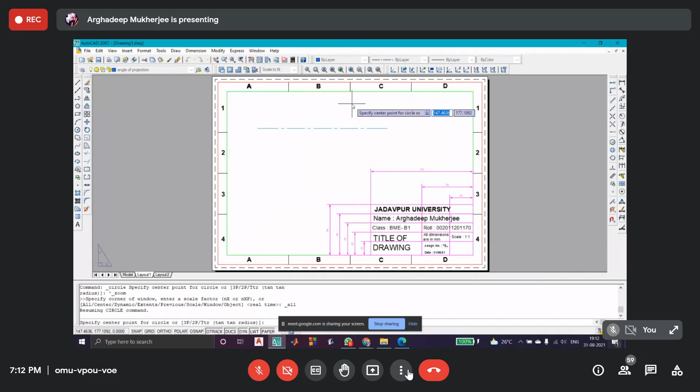I've drawn it. I know from the center of the circle this length is 12.5 millimeters, so I come over here, at this point 12.5. Now from 12.5, if I draw a line like that, and project from this point and this point, because I'm viewing the circle from here, the projection will be the maximum line, the length of the line extended up to this, because this point and this point must be the same. So I get this.

So once I get this point and this point, I have drawn the inclined line, which is 15-degree inclination, and I mirrored this line with respect to this mirror, the center line. So I get this line starting from here. Now I connect this one. I checked whether the angle between this inclined and this slant line is 30 degrees or not. I have checked, it is okay.

I have taken this distance 10, then only I can draw this one. This is that, and when I shift, I have drawn this figure arbitrarily. I don't know whether this dimension is suitable to fit within that small slot of the title box. So what I did, I just reduced the scale of the drawing and fit it there. That's it. Okay, thank you.